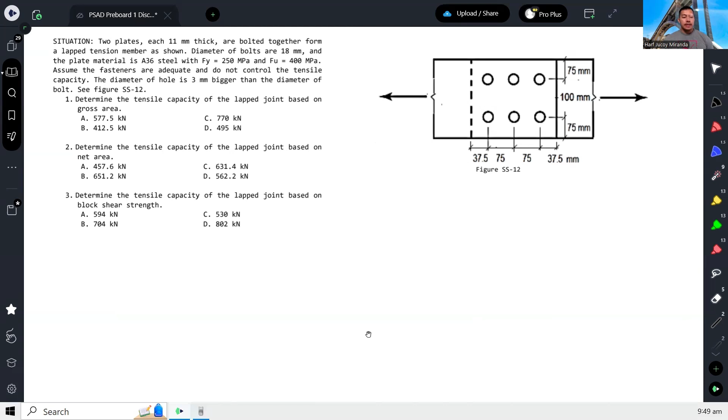Two plates, each 11 millimeters thick, are bolted together to form a lap tension member as shown. Diameter of bolts are 18 millimeters, and the plate material is A36 steel with Fy equals 250 and Fu equals 400. Assume the fasteners are adequate and do not control the tensile capacity. The diameter of hole is 3 millimeters bigger than the diameter of the bolt.

So determine the tensile capacity of the lap joint based on the gross area. Determine the tensile capacity of the lap joint based on net area. And the tensile capacity of the lap joint based on block shear strength.

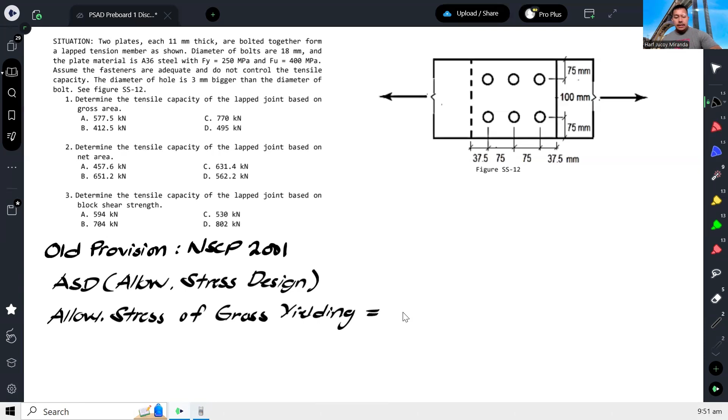The allowable stress for gross yielding is 0.6 of Fy.

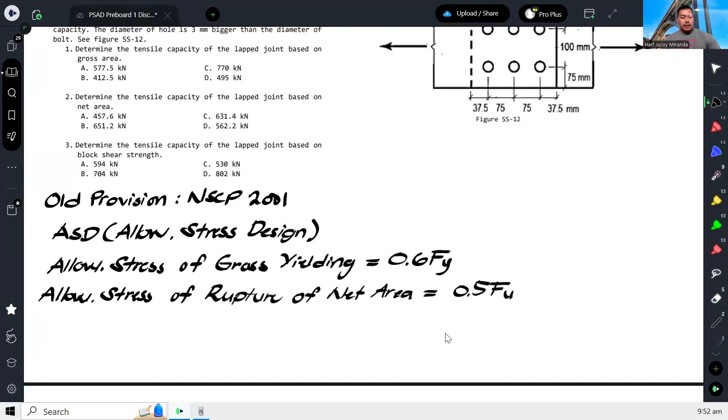Then the allowable stress for rupture of net area is 0.5 of Fu.

And then the allowable stress of shear is 0.3 of Fu.

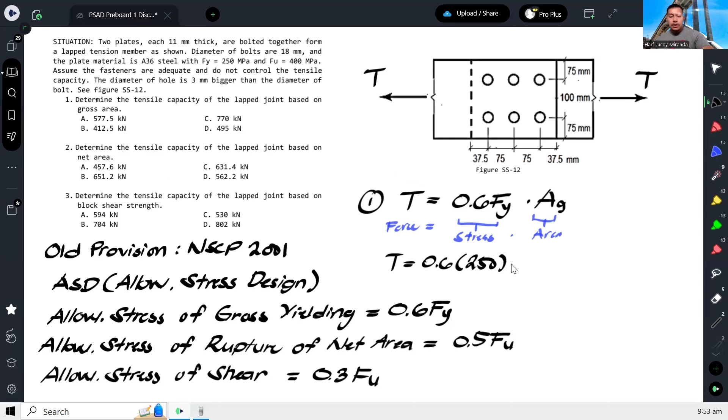But this area will be the gross area. So that would give me 0.6 of Fy. Our gross area here, this is a plate. So this is our gross area.

The total dimension of this, as you can see, 75 plus 100 plus 75, that's 250. Then our thickness, as given, is 11. So our gross area would be 250 times 11.

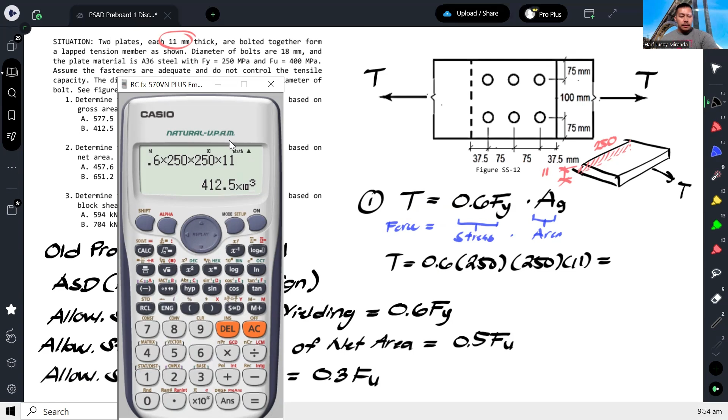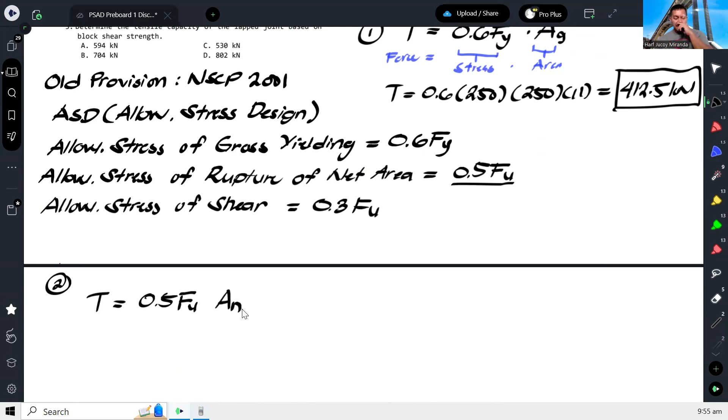Next, number 2. Determine the tensile capacity based on net area. So this is our allowable stress for that. So still, T is equal to, we use 0.5 Fu, but this is net area now. So for the net area, that's for rupture.

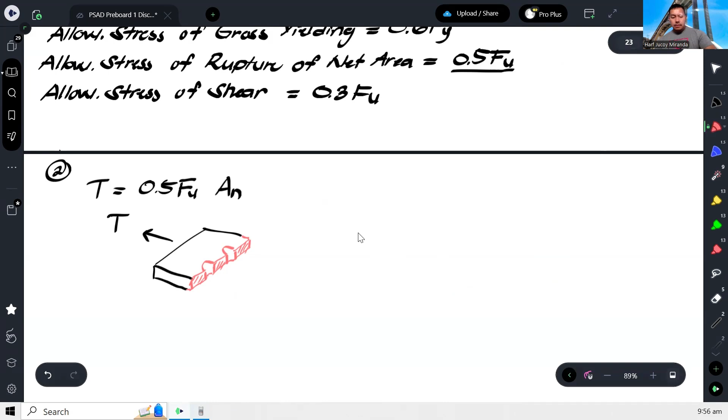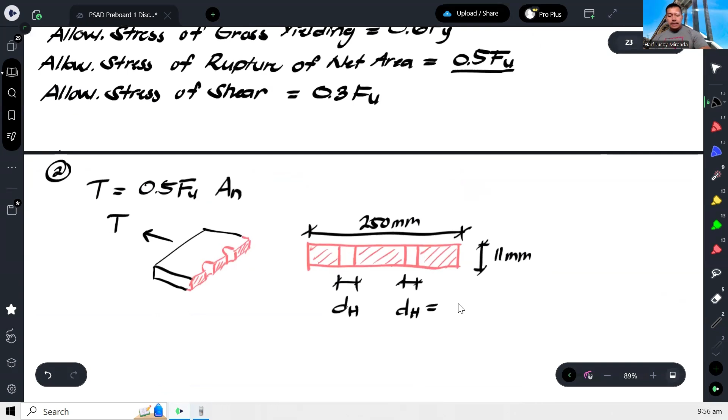But the hole should not be included. So take note, this is the diameter of the hole, not the diameter of the bolt. That's a hole. And the problem says the hole is 3 mm bigger than the bolt. Our bolt is 18. So it should be 18 plus 3, so 21. So therefore, our net area, I'll put this in.

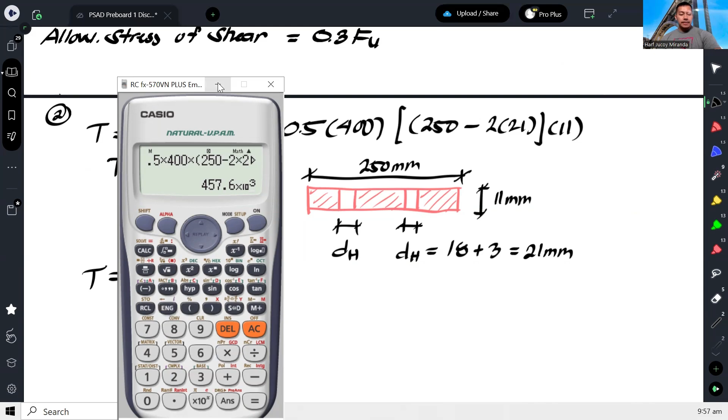0.5 of Fu. Our net area is 250, minus two holes, then multiply by 11, since that's the thickness. So our allowable would be 0.5 times 400 times 250 minus two holes times 11. So that's 457.6 kilonewton.

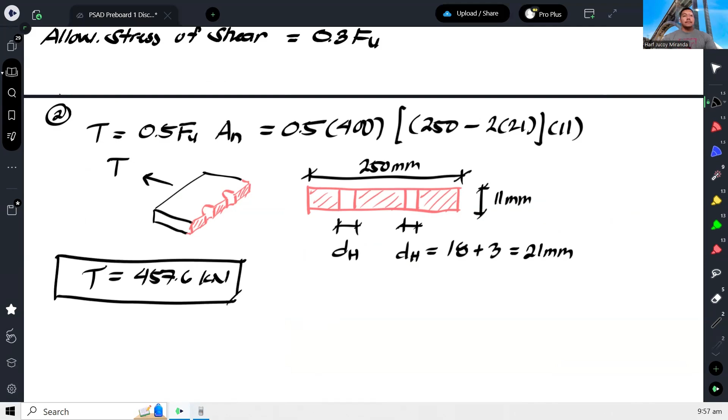Next, determine the tensile capacity based on block shear. So for block shear, there are only two cases.

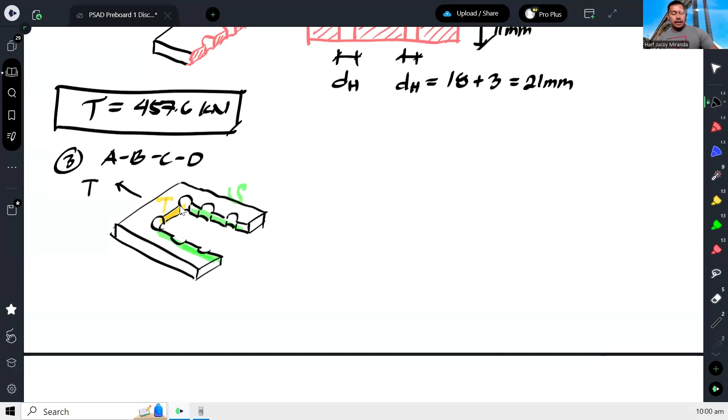Ibig sabihin, yung total force niyan, yung force na galing dito sa tension, tsaka yung force na galing dito sa shear. Yung T natin will be equal sa force galing sa tension plus yung force na galing sa shear. Ano ba yung force galing sa tension?

So that is 0.5 FU, kasi rupture na to eh, times yung area net sa tension, plus ano naman yung sa shear, o the allowable stress times area.

Yung allowable stress sa shear, sabi ko kanina, 0.3 of FU yun. So we will have 0.3 of FU tapos yung net area for shear. So ganyan mangyayari, kasi combination na yan ng tension tsaka shear.

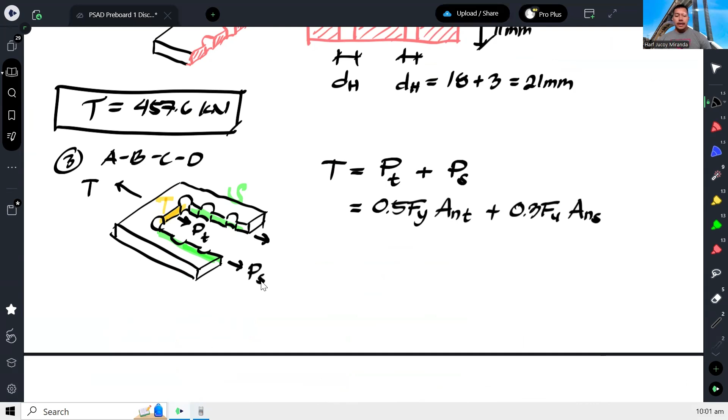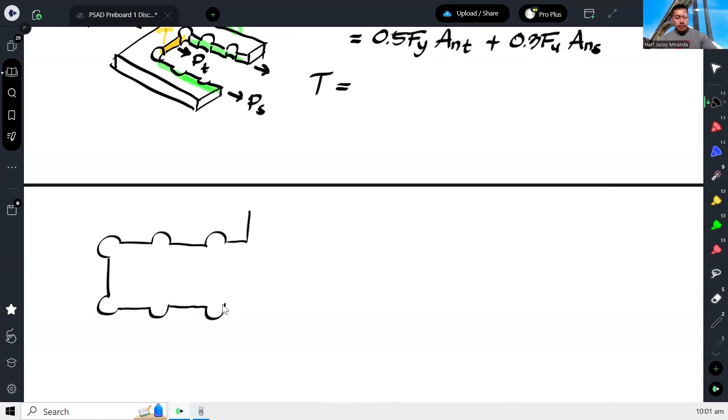Okay, so let's see. Sa top view para lang madaling makita. Ganyan siya. May mga sukat yan. So according to the figure, ang sukat na yon ay 75, 75, 37.5.

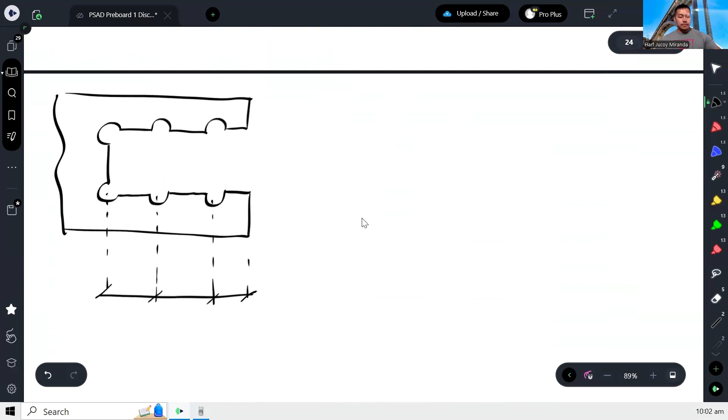Tapos ito naman, 100, 75.

Okay, so define natin dito yung net area for tension. Ang net area for tension natin, ito lang guys. Yan lang. So that is 100. Kaya lang yung 100, take note, center to center yan.

So, ima-minus natin yung radius na itong butas sa ibabaw at radius ng butas sa ilalim. Basically, isang buong butas, ibabawas natin. Times thickness.

The net area for shear would be ito naman, ito, plus ito, plus ito. Plus dalawa yan, times 2 yan. Meron din sa ibabaw.

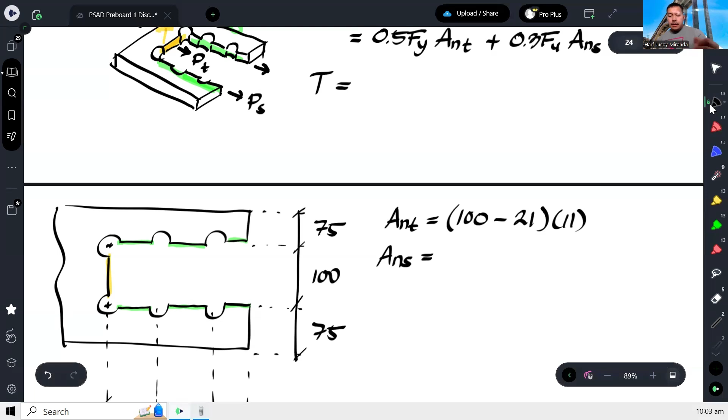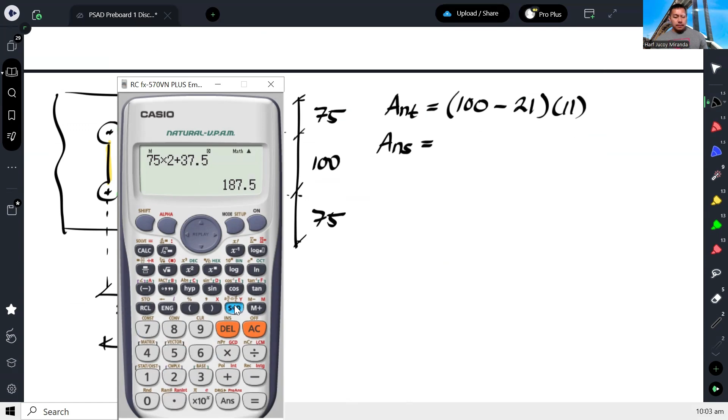Okay, so kapag ganyan, tingnan natin, pwede na, this is a total of 187.5.

So 187.5 minus ilang butas yan? Isang buo minus isang buo. So dalawa na, kasi ito kalahati lang. Kasi hanggang dito lang yung sukat natin na 187.5.

So, 2.5 lang. 2.5 ng 21 times 11. Tapos times 2 kasi meron pa tayo sa taas. So yan yung mga net area for shear.

So therefore, gamit yung mga yan, pwede natin ma-compute. So 0.5 FU ha, kasi rupture na yan. So 0.5 FU, lagay ko na muna sa A yung area sa tension, plus 0.3 times FU, tapos lagay natin sa B yung area sa shear.

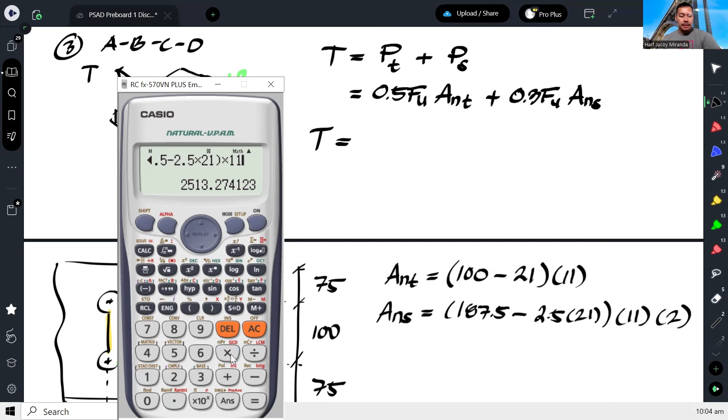So calc, ito ay 100 minus 21 times 11. Next, we have 187.5 minus 2.5 times 21 times 11, tapos dalawa silang side. Ayan, so lalabas dito, 530.2 kilonewtons.

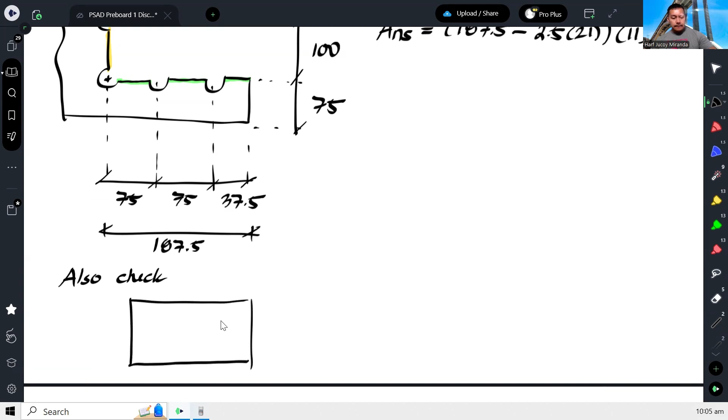Okay, pero hindi pa yun yung sagot, ano? Mag-check pa tayo ng iba, no? So actually, ang iba pang i-check dito, ito. Lagay ko lang dito sa baba, no? Also check. Ganito.

Okay? Kapag ganyan, ito yung under tension. Ito, ito, at saka ito. Tapos ito naman yung under shear.

Yan. Okay, ano pa? Pwede rin ganito. Pwede rin ganyan. Ito yung under tension. Sorry, ito yung under shear. Ito yung under tension.

Ayan, okay, so you can check. And you don't need to check yung other kabila kasi parehas lang naman yan eh, parehas lang na sukat, no? Pero guys, sa board exam, ganito.

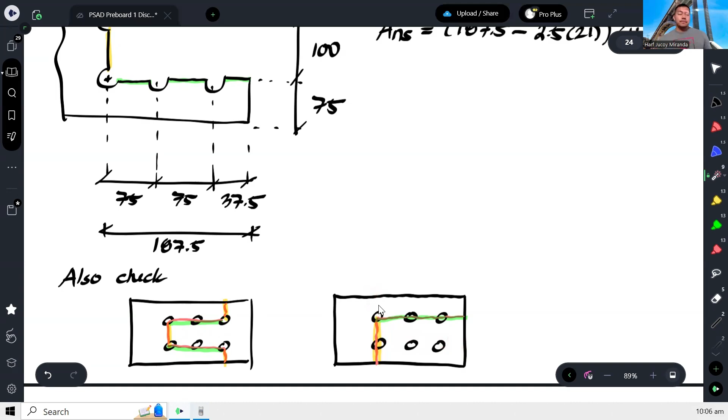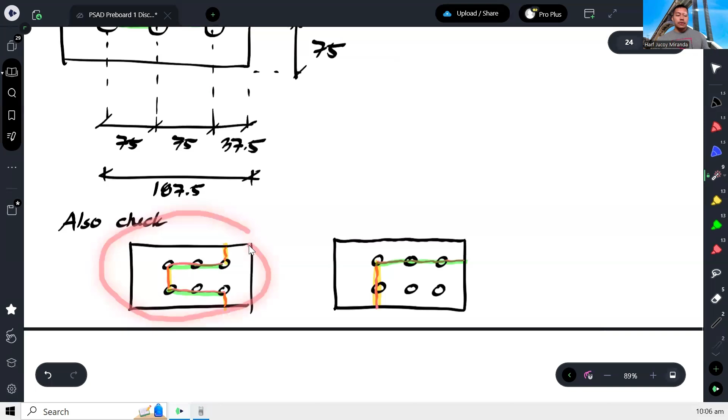Di ba na-solve natin 530? Tignan mo yung choices. Di ba ang goal natin is mahanap dito sa lahat ng configuration yung pinaka-smallest, pinaka-maliit. So ibig sabihin, kapag chinek ko to, o di kaya ito, pwede na mas mababa yan sa 530, no? Pwede.

Kaya lang, sa choices kasi, yun na yung pinaka-mababa eh. Wala nang iba eh, puro matataas na yan eh. So sigurado na tayo dito, ito na yung sagot. You don't need to check the others para hindi ka na masayangan sa oras.

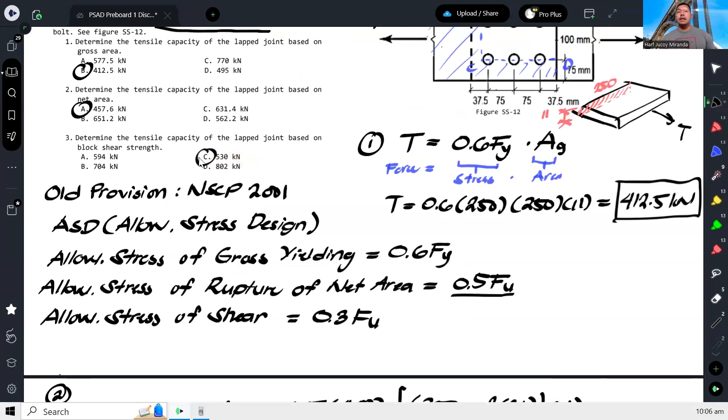Total, kahit na na-prove mo na mas critical ito, o di kaya ito, let's say meron ka na solve dyan na mas mababa, let's say 400, wala rin naman sa choices yun eh. No? So ibig sabihin, wala rin silbi. Ang isasagutin mo pa rin kung ano yung napalabas mo na pinakamababa sa choices.

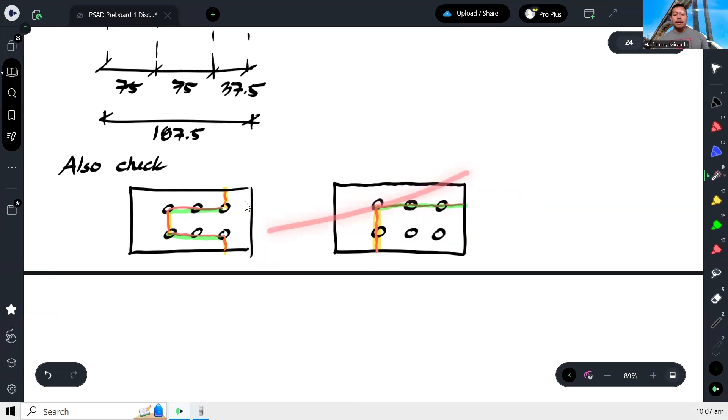Kaya sa ganitong diskarte, pwede mo, dapat i-apply natin yan sa actual na board exam. Okay, yung kukumbitin mo to lahat, ano lang yun, pang college lang yun, no? Kumbaga, pang sa university, kasi kailangan mo ipakita lahat eh.

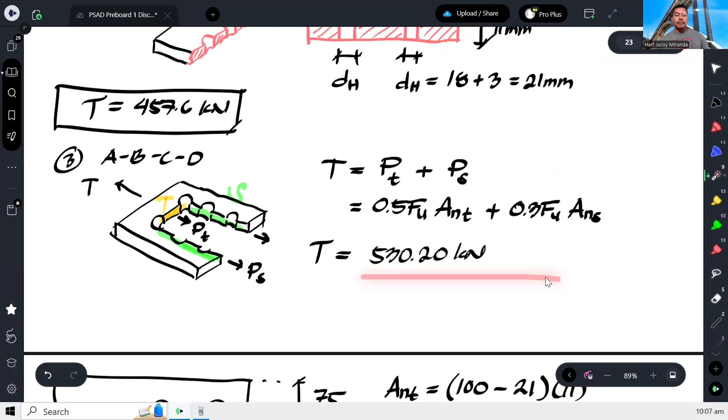Pero sa board exam, ang diskarte dyan, pag meron ka napalabas doon na mababa, tapos yun na yung pinakamababa sa choices, yun na yung piliin mo. Huwag ka na magsayang ng oras. Okay, so that's how we solve this problem.